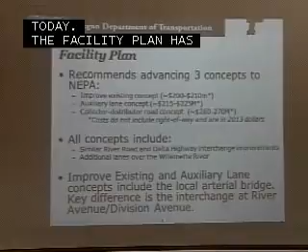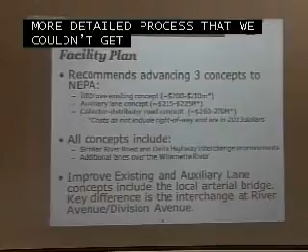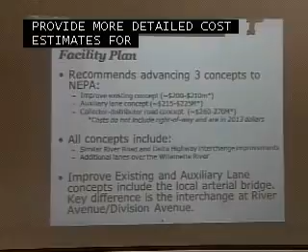The facility plan has 3 concepts that we are recommending to move into NEPA, the National Environmental Policy Act. This is going to be the much more detailed process that we couldn't get into at the planning stage. It will look at real property impacts, real environmental impacts, and provide more detailed cost estimates for each concept so we as a community can be better informed on which one to select when it comes time to construct something.

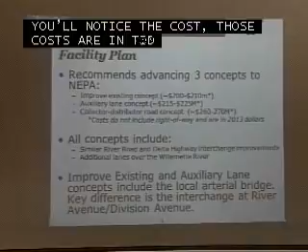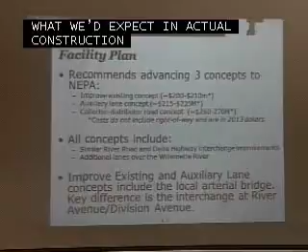You'll notice the cost up there. Those costs are in today's dollars, 2013 dollars, and they do not include right-of-way. So that's just a heads up that these are on the lower end of what we'd expect an actual construction project to be. All of the concepts have similarities for River Road and Delta Highway interchange improvements, and they all do have some sort of additional lane over the Willamette River.

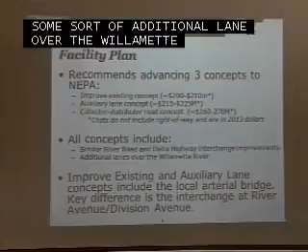The two concepts that include a local arterial bridge, and I'll get into detail about this in just a second, are the improved existing concept and the auxiliary lane concept.

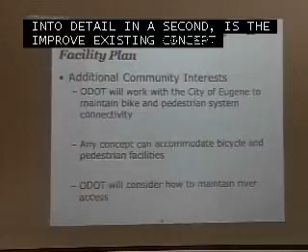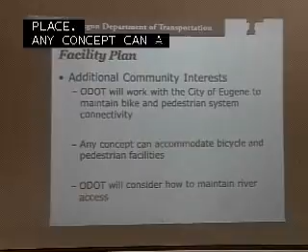One item I wanted to note is there are several themes that kept coming up as part of this process. These themes really were bicycle and pedestrian connectivity. So some of the maps you'll see in front of you today show impacts to nearby bicycle facilities. We wanted to note that just because they're showing impacts does not mean we won't make improvements to those facilities at time of construction. We are committed to making sure all connectivity remains in place. Any concept can also accommodate bicycle and pedestrian facilities. This is important to note because a variety of concepts, some of them do house bicycle and pedestrian facilities better than others, but nonetheless, they all can accommodate that.

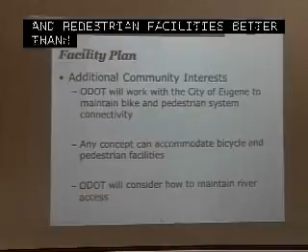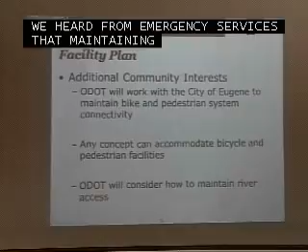Another key theme was river access. We heard from emergency services, we heard from the public that maintaining river access for safety, recreation purposes, and emergency services is critical. So we wanted to definitely keep that in mind as well.

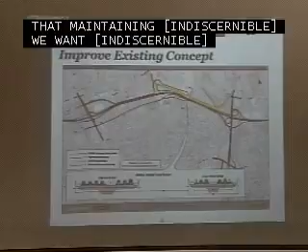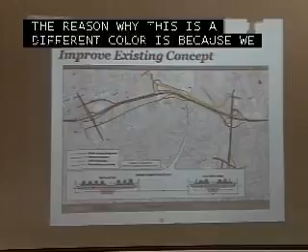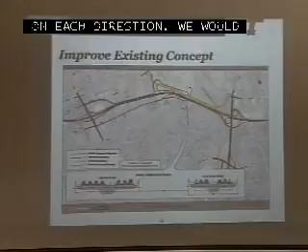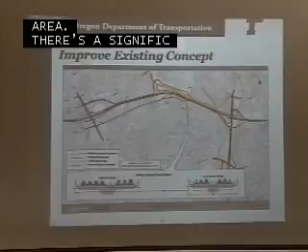Start with the improved existing concept. What you see up here is in yellow. So the yellow is the local arterial bridge concept. The reason this is a different color is because we wanted to emphasize that this would be envisioned as a lower speed local facility. So this would not be a highway facility. We would envision travel lanes in each direction, bike lanes, sidewalks. It would be very much a local facility to allow for a lot of the traffic movement coming from the Santa Clara area to the Green Acres area.

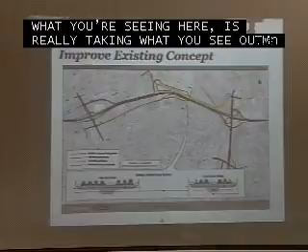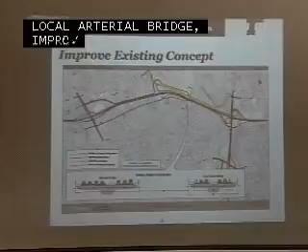There's a significant amount of traffic that just crosses the bridge to make those movements. So what you're seeing here, the improved existing concept, is really taking what you see out there today and improving it. You're seeing a lot of the same configurations, still an underpass at River Avenue, Division Avenue. You're seeing the addition of a local arterial bridge, improvements to Delta, Goodpasture interchange, River Road, and again a new lane across the river as well.

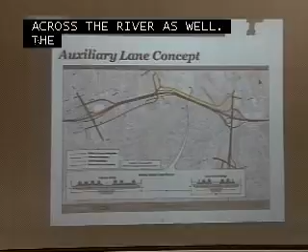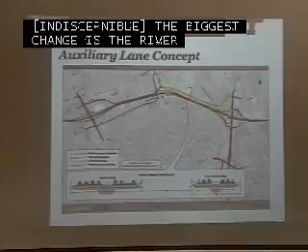The auxiliary lane concept has some similarities to the one I've just explained. Again, you have the local arterial bridge concept. The biggest change here is the River Avenue, Division Avenue interchange. Instead of an underpass, you see a new interchange at this location. So this is an overpass. That is the biggest difference in this particular location.

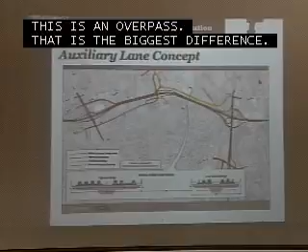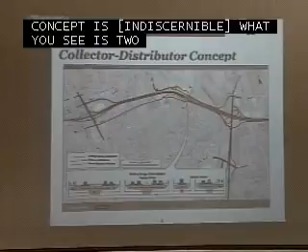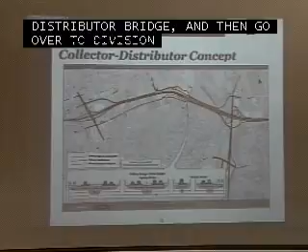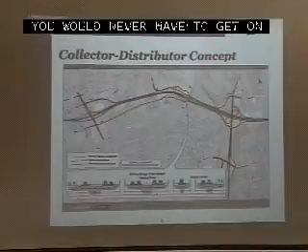The collector-distributor concept is quite different. What you see here is two new parallel structures to Beltline Highway. This would continue to be a highway facility, both of those new parallel structures. This allows people who want to stay on Beltline to travel all the way through without anybody coming in on or off at this location. So anybody who wants to get off at Division, for example, would start here, take this collector-distributor bridge, and then go over to Division Avenue. Same going east. If you wanted to get off, let's say Goodpasture, you would take this collector-distributor bridge to Delta Highway. You would never actually have to get on Beltline or get off of Beltline at that location. So you're eliminating that weave movement.

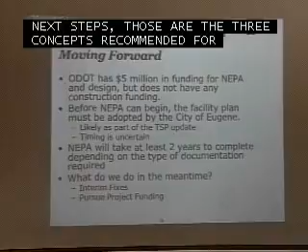So next step, those are the three concepts we're recommending for NEPA for further analysis. Moving forward, we currently have $5 million for NEPA and design, but we do not have any construction funds designated for this segment of highway at this point.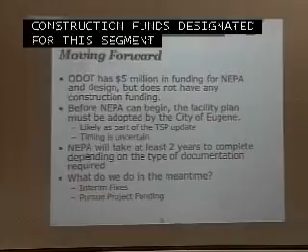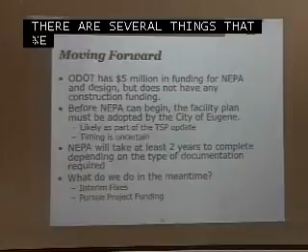Before NEPA can begin, we definitely need the facility plan to be adopted. There are several updates that need to occur from the City of Eugene side. At this point, our plan is based upon City of Eugene land use and traffic assumptions, and right now you guys are updating your TSP through Envision Eugene. When that is complete, we'll roll all of those assumptions into the facility plan to make sure they're consistent, and then we can go into a full-blown NEPA process.

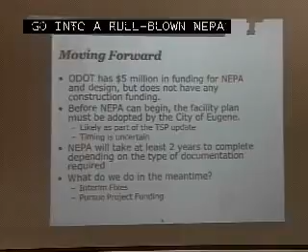NEPA typically takes about two years to complete, depending on the type of documentation that is needed. And we are committed to trying to figure out what to do with Beltline in the meantime.

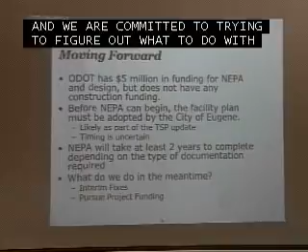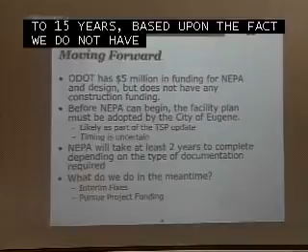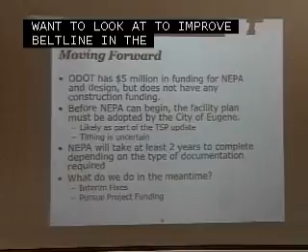We've been saying you would not see major construction or major improvements to the Beltline Highway for another 10 to 15 years, based on the fact that we do not have funding. So what do we do in the meantime? You've recently seen the ramp meters that came out of the Jobs and Transportation Act. We are looking at possibly doing some ramp extensions over at the Delta Highway interchange. There are a variety of things we want to continue to look at to improve Beltline in the interim before we can get a major funding package in the works.

Think about that for a second.

I appreciate the opportunity to serve on this. It's been six years now that we've been working on this, with two more to go for NEPA and 10 to 15 estimated for a real fix to Beltline. For me, that's unacceptable. I know that's the constraints of the system and the statewide system, and it's not a source of soreness by any means, but for the folks who live out there in that part of North Eugene, that's an extreme problem. So while I'm hopeful that the rest of my colleagues see all the work that's been done and recognize the value, and recognize that there are three good choices here, and that we can help get you to proceed through that process, I wonder how we might develop strategies that would move the construction phase more quickly. That's what I'd like to know.